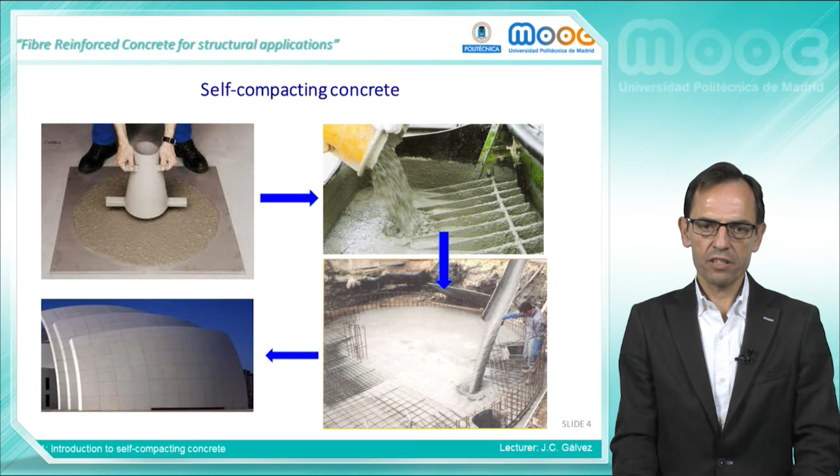The key aspects of self-compacting concrete are the following: filling ability of the fresh mix to flow under its own weight and completely fill all the spaces in the formwork. The filling ability also governs the self-compaction. Passing ability of the fresh mix to flow through confined and constricted spaces, narrow openings, and between reinforcements. Passing ability is linked with the filling ability. Both filling ability and passing ability are required for a fresh mix to be adequately self-compacting concrete.

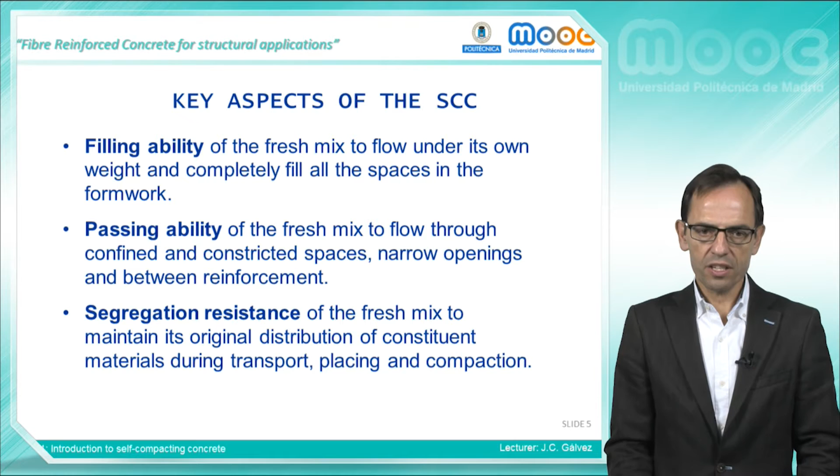Segregation resistance of the fresh mix to maintain its original distribution of constituent materials during transport, placing, and compaction. Additional aspects of self-compacting concrete are the following: pumpability. Practically all fresh self-compacting concretes are pumpable. Finishability. Self-compacting concrete provides easy production of distinct types of surface finish. Each type of finishing has its own requirements of mix design and fresh state behavior.

Self-leveling, that is important for construction of floors, slabs, and pavements. Flow rate, to control the speed of the flow. The flow is important for large or complicated pourings and also in precasting. And finally, washout resistance. This is a key aspect for underwater concrete.

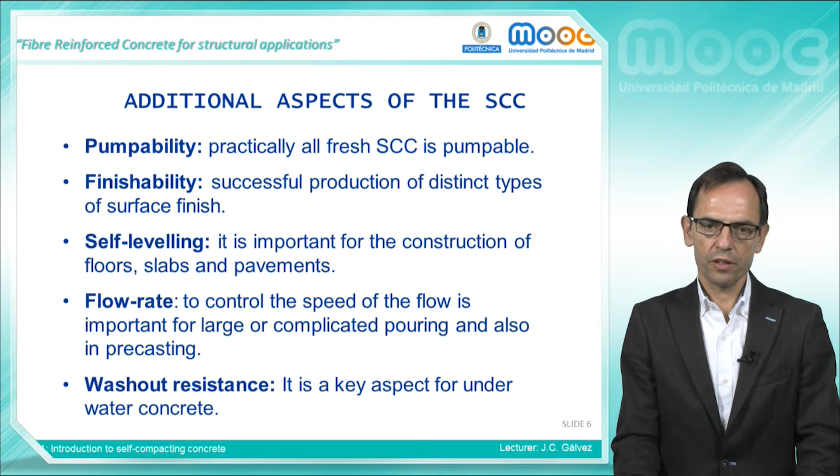A very brief history of self-compacting concrete. The post-war reconstruction of Japan in the 50s and 60s led to a building boom, with the speed of construction and low quality being the main cause of deterioration 1 or 2 decades after. Professor Okamura from Tokyo University, in collaboration with Maekawa, Ozawa, and Ouchi, concluded that there was insufficient compaction in many of the buildings that showed durability problems. They received the task to design the modern self-compacting concrete for avoiding these problems in the early 1990s.

After that, in 1992, there was the first presentation about self-compacting concrete at an American Concrete Institute meeting. In 1997, the first RILEM Committee on Self-Compacting Concrete was created. In 2002, the European Federation of Specialist Construction Chemicals and Concrete Systems published the first European guidelines for self-compacting concrete.

We have here some pioneering applications of self-compacting concrete. In 1992, the foundation and massive cable anchorage of the Akashi Kaikyo suspension bridge were built. A total of 500,000 cubic meters of self-compacting concrete were cast, and the reduction of the construction time was 6 months. In 1997, a liquid natural gas tank for the Osaka Gas Company was constructed using self-compacting concrete. The pace of casting was 225 cubic meters per hour, and the reduction in time was 4 months in a project

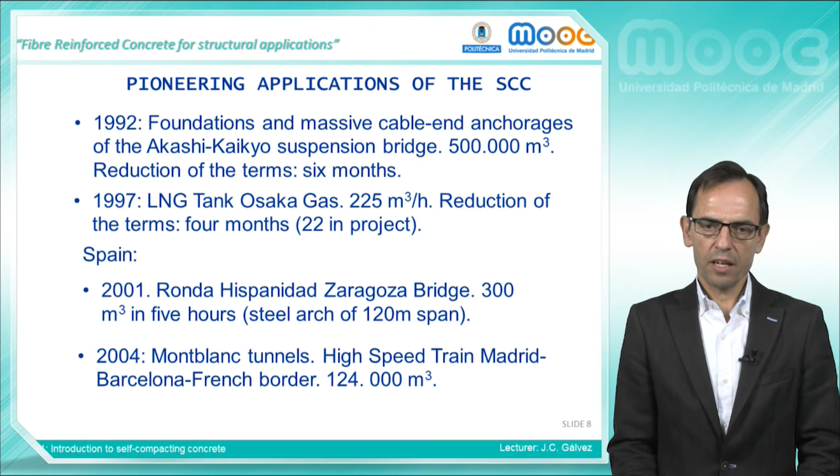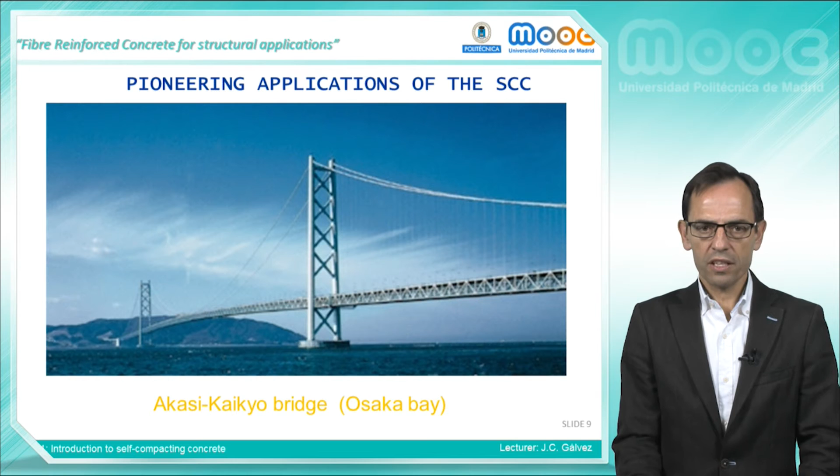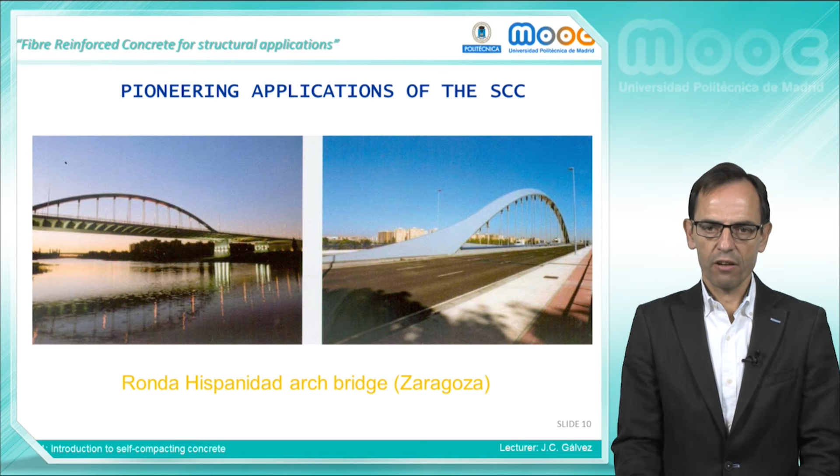of 22 months. This is a picture of the Akashi Kaikyo suspension bridge with a span of 1,990 meters. The cables are anchored into massive blocks of self-compacting concrete. This is a picture of the Ronda Hispanidad Bridge in Zaragoza, Spain. The inside of the steel arch was filled with 300 cubic meters of self-compacting concrete cast in 5 hours. The span of the arch is 120 meters.

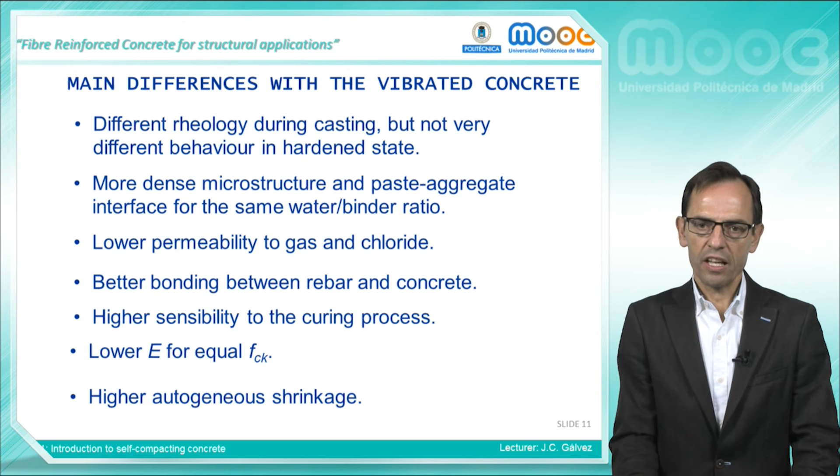The main differences between vibrated concrete and self-compacting concrete are the following: different rheology during casting, but not very different behavior in hardened state. More dense microstructure and paste-aggregate interface for the same water-binder ratio. Lower permeability to gas and chloride as a consequence of the closer microstructure of the cement paste. Better bonding between rebar and concrete. Higher sensitivity to the curing process due to the higher content of cement and additions. Lower modulus of elasticity for equal compressive strength. And higher autogenous shrinkage rates, also due to the higher contents of cement and additions.

The constituent materials of self-compacting concrete. Cement: typical Portland cements or equivalent may be used in combination with at least one addition. Aggregates: rounded and crushed aggregates may be used. Maximum size lower than 20 mm, and 12 or 16 mm are recommended. It's very important to control the water content in this material. Additions: a high content of particles of size lower than 0.125 mm, including cement, is essential. It is suitable that 70% of the fine particles pass through the 0.063 mm sieve.

Admixtures: superplasticizers are essential. In addition, viscosity modifying admixtures in combination with superplasticizers can improve the stability of the self-compacting concrete. The compatibility of the admixtures should be checked.

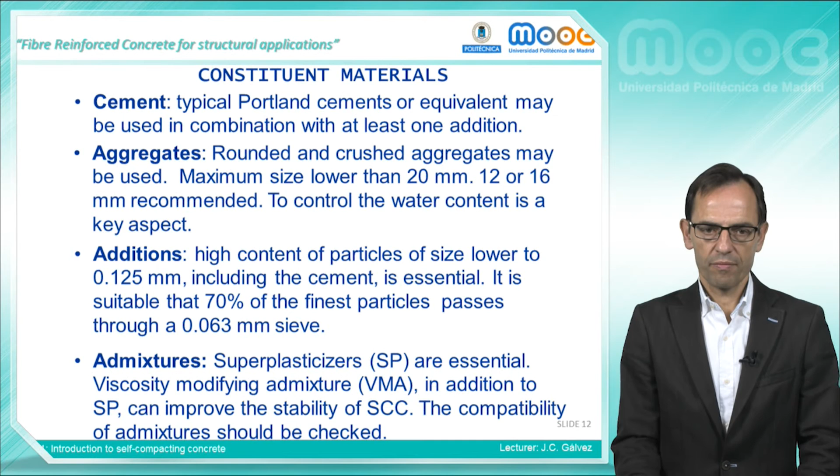Range of the key proportions of self-compacting concrete. Cement, 200 to 450 kg per cubic meter of concrete. Powder, that is cement, additions and sand powder, from 380 to 600 kg per cubic meter of concrete. Paste, powder plus water, 33 to 40% of the total volume of concrete. Coarse aggregate, 750 to 920 kg per cubic meter of concrete. Fine aggregates, 710 to 900 kg per cubic meter of concrete. Water, 150 to 200 kg per cubic meter of concrete. And admixtures as needed, typical values range from 1 to 2.5% of cement weight.

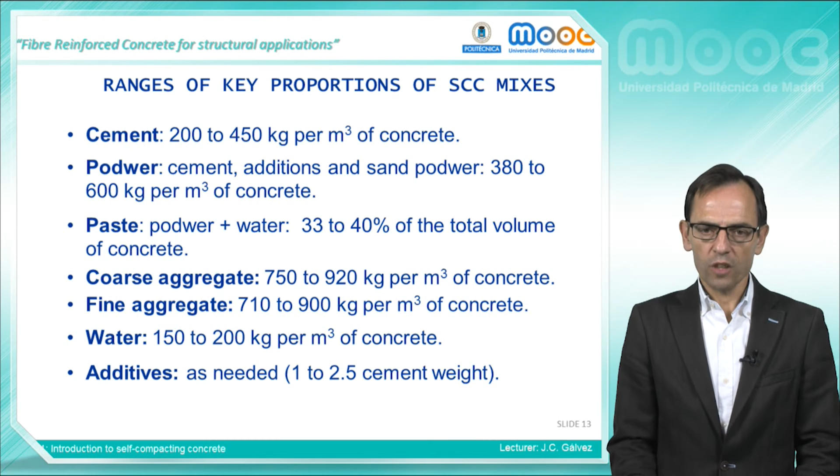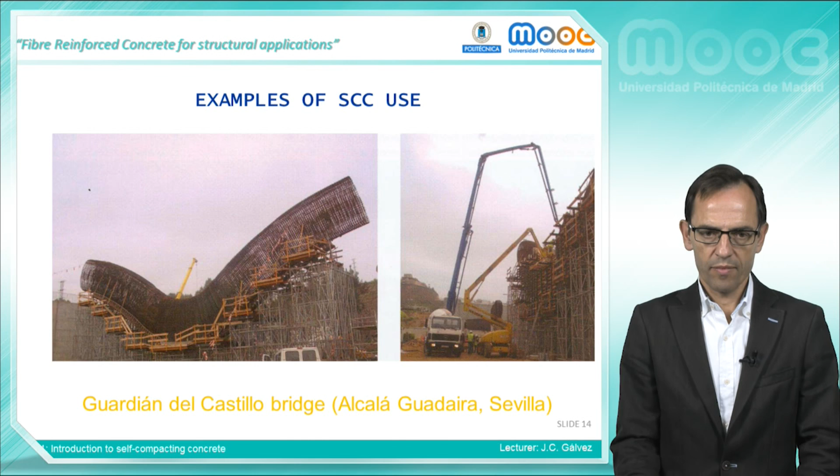We have here some examples of the use of self-compacting concrete. This is the Guardián del Castillo Bridge in Alcalá de Guadaíra, Spain, with very narrow passing zones among rebars for concrete and curved surfaces. This is a general view of the finished bridge. It is worth noting the quality of the dragon tail, which was problematic for precasting.